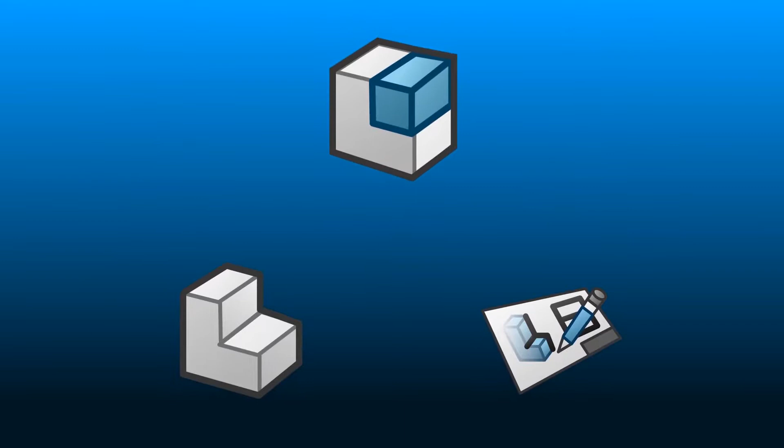Whether you work in a large organization or just a small team, no doubt you're concerned with storing, managing, and collaborating on your design data. And it's tricky, because SOLIDWORKS parts, assemblies, drawings, and other supporting documents are all linked. Consumer cloud storage apps don't know how to handle that. Maybe the investment in SOLIDWORKS PDM and Manage isn't right for you.

There is another way. When you connect SOLIDWORKS to the 3DEXPERIENCE platform, cloud data management is just a few clicks away. Eric Engineer and Debbie Designer are part of the team working on the Nemo submersible. They are on a tight deadline to finish up the hatch design.

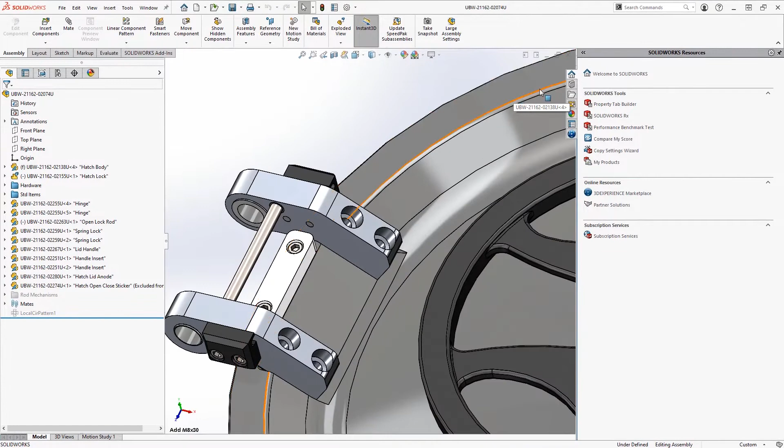Eric puts the finishing touches on the latch mount by inserting fasteners from SOLIDWORKS Toolbox. A quick check on the assembly drawing, and everything is up to date and ready to save to the cloud.

First, he logs into the 3DEXPERIENCE platform. It's his team's secure connection to the cloud. Right from the task pane, he sees the status of his work. These indicators show which components need to be saved.

As for the hardware and other standard parts, SOLIDWORKS is configured to automatically catalog and release these items so all users can access their shared libraries online.

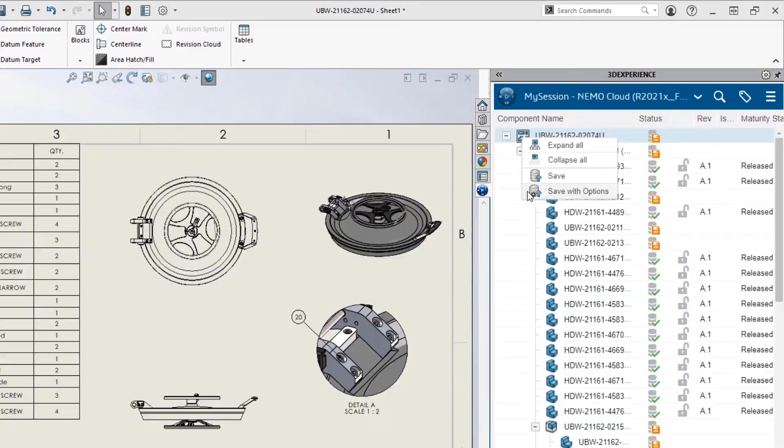The Save dialog shows exactly which items require an update. He can also assign any item to a bookmark, such as related drawing files. Out of a long list of components like this, bookmarks are a convenient way to flag them for easy access.

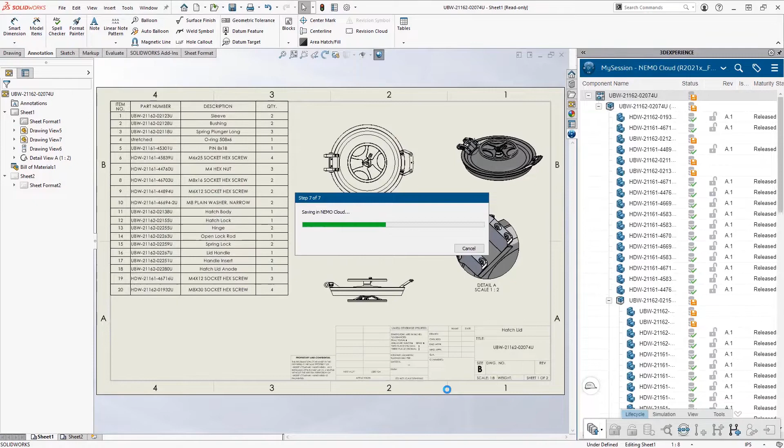Only the new or changed items need to be uploaded to the cloud. This makes efficient use of network bandwidth, but still ensures everything is up to date.

As the leader of his team, Eric is able to release his own designs. Easy-to-use lifecycle operations like this help the team avoid accidental overwrites.

Switching over to his Bookmarks tab, he sets the related part and assembly drawings to Released. It's just 2 drawings for now, but as the detailing work continues, the bookmark will keep everything organized for quick access.

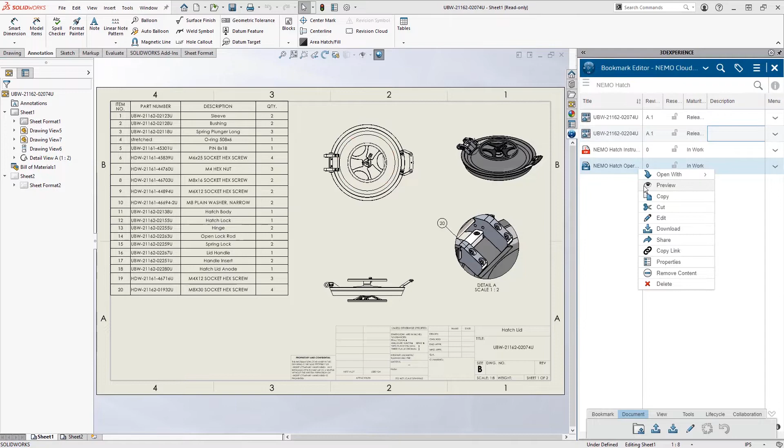That includes any other supporting documents, like this PDF instruction sheet and the related SOLIDWORKS Composer file. Most document types can be previewed interactively within the SOLIDWORKS task pane. No need to launch external viewing apps.

Eric has a backlog of finished designs that also need uploaded to the cloud. He can automate this with a batch save. He just selects his local design folders and assigns them to the appropriate cloud space. SOLIDWORKS takes care of the rest.

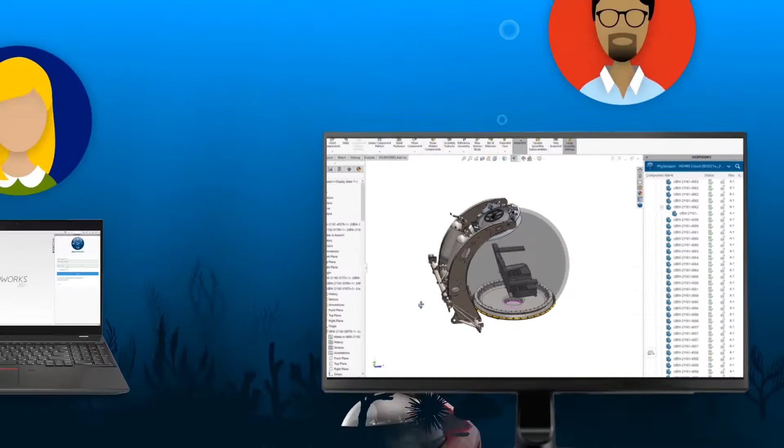As the Nemo sub-design evolves, the team must respond to change orders quickly. Debbie logs into her session and sees a message from Eric requesting a change. A quick keyword search shows several results. This one looks right.

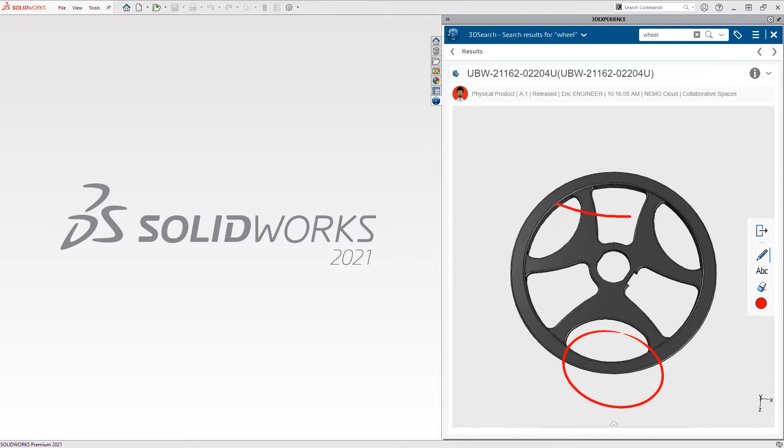Debbie uses the 3D annotation tools to quickly sketch out a couple ideas. From here, she opens the part in SOLIDWORKS. The latest version is automatically retrieved from the cloud.

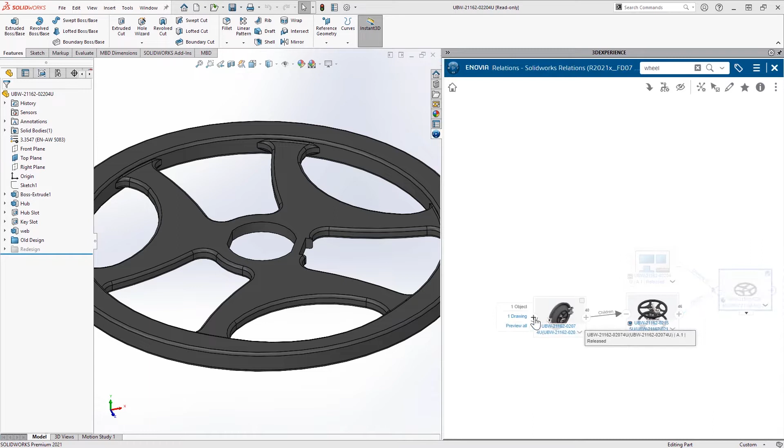Before she makes any changes, it's best to do a where used search. The hand wheel is used in one subassembly below the master hatch assembly. She can open that right into her modeling session and get to work.

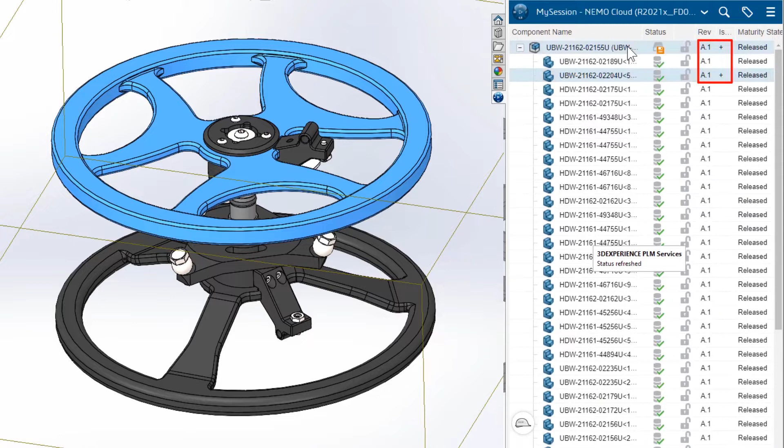This version of the subassembly is released. In order to make changes, Debbie needs to create a revision of the assembly and the hand wheel. The status indicators immediately show that the current assembly structure is out of date.

So she replaces it with the new revisions and sets them to reserved. This gives her write access to the items she needs to modify without locking other users out of the rest of the assembly.

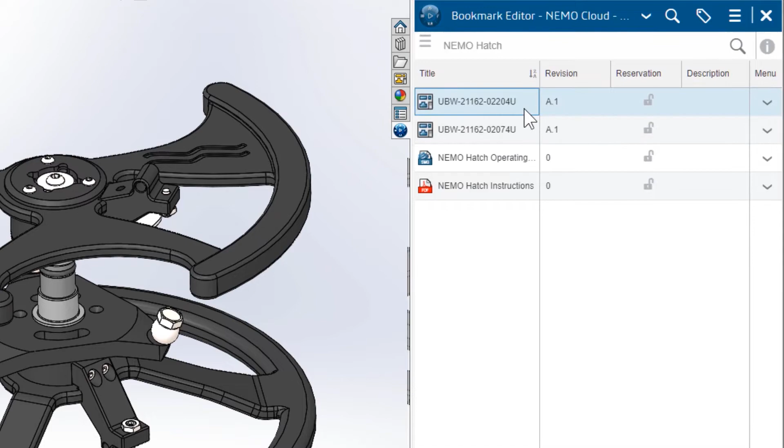The redesigned hand wheel looks great, but she needs to update the drawing. The shared bookmarks give Debbie quick access to the related drawing files.

The drawing is now in sync with the part model, so she saves it to Revision B, then sets the part and drawing to a frozen state so they can be reviewed.

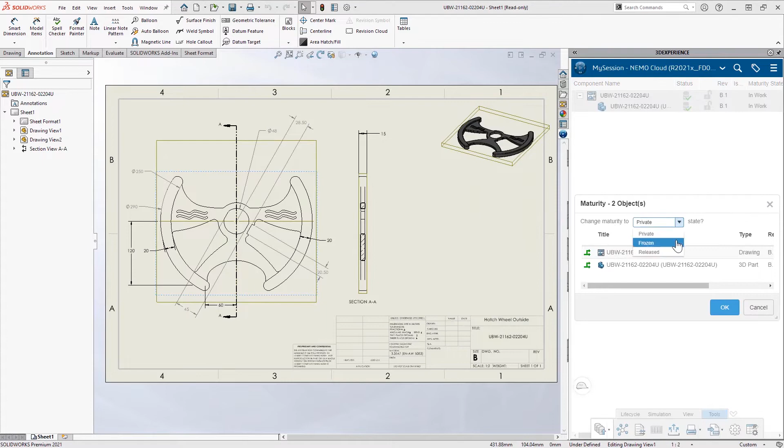Returning to the assembly, she finishes out the design by adding the latch mechanisms and saves the new revision back to the cloud.

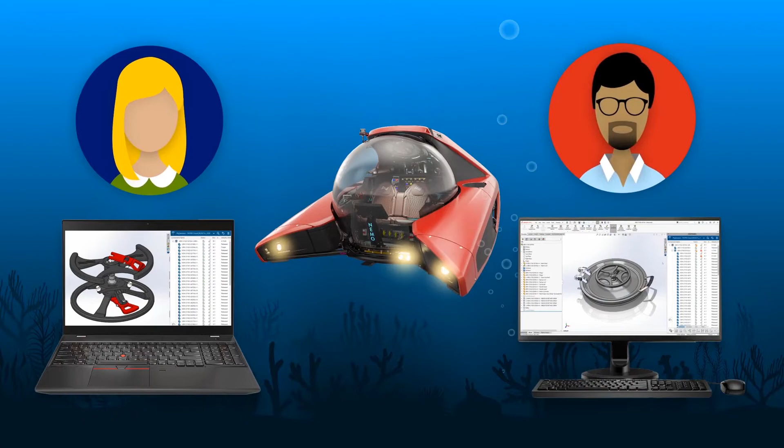In order to meet their tight deadline, the Nemo team often needs to work on the same design files at the same time. Eric is working on a new revision of the master hatch assembly.

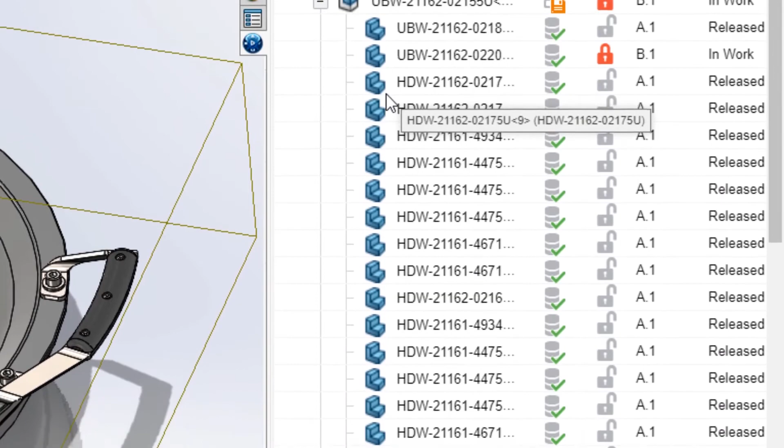These icons let him know Debbie has the hand wheel assembly reserved and is currently making changes. He can reserve the top-level assembly without affecting Debbie's work on the subassembly. This modular approach to access control allows users to design concurrently without accidentally saving over each other's progress.

A short time later, Eric sees that Debbie has finished up. He just needs to reload the latest version of the subassembly from the server.

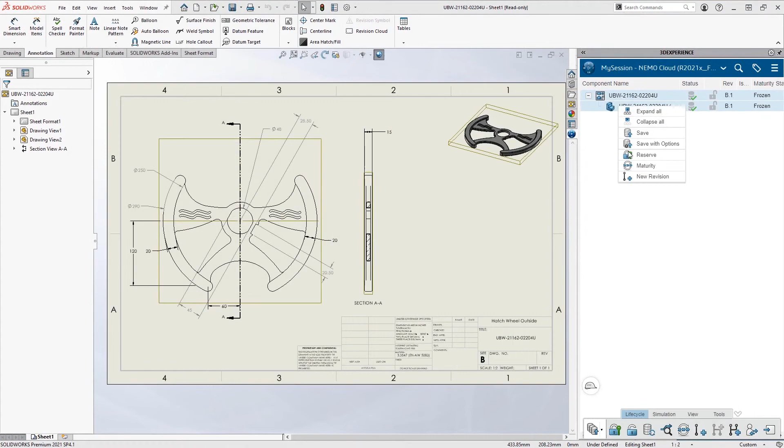Taking a look at the hatch wheel drawing, he likes her redesign and moves it to released. Back in the assembly, Eric attaches the connecting rod mechanisms, then returns to his bookmarks to update the drawing.

Bumping the assembly and drawing to revision B, he's ready to save.

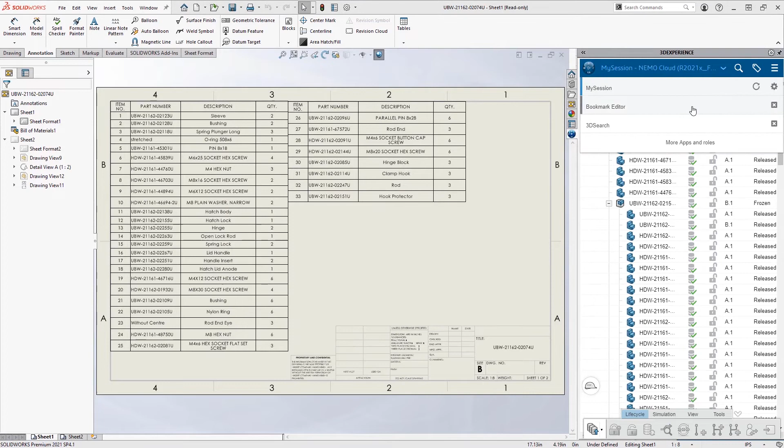The revised hatch assembly requires new versions of the supporting documents. From the convenience of his Bookmarks tab, Eric uploads the latest version of the Composer file and uses the interactive preview to inspect the latest revision.

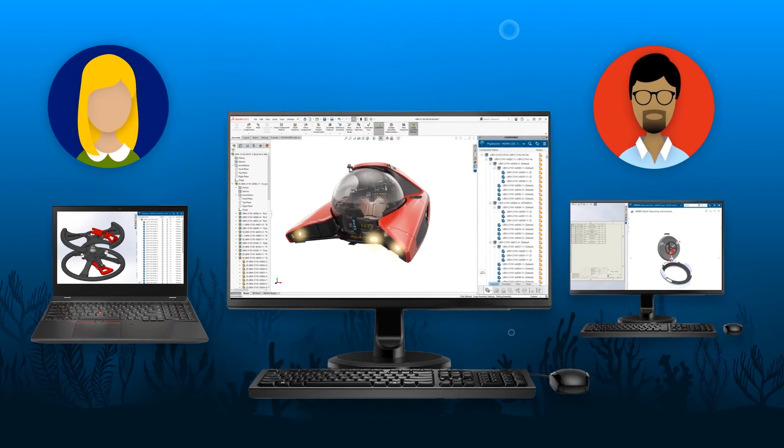Out-of-the-box cloud data management enabled the Nemo team to be productive right away. They were able to safely store their data, manage changes, and design concurrently, all without ever leaving their familiar SOLIDWORKS design environment. Everyone in the organization benefits when you connect SOLIDWORKS to the 3DEXPERIENCE platform.